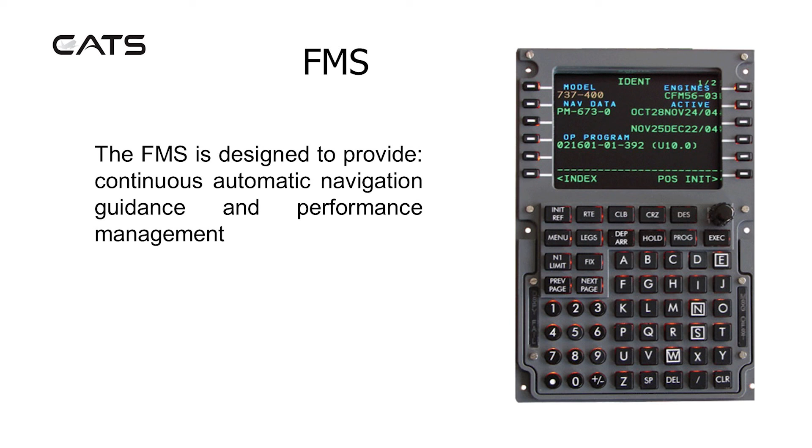FMS, Flight Management System. The FMS is designed to provide continuous automatic navigation guidance and performance management. It was first introduced on the Boeing 737-200 in 1979 as the Performance Data Computer System. The flight management computer was a huge technological step forward. Smiths Industries has supplied all FMCs installed on the 737.

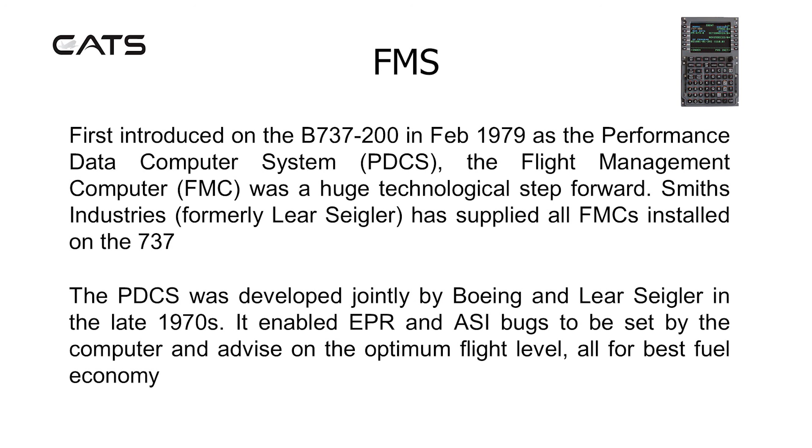The Performance Data Computer System was developed jointly by Boeing and Lear Seigler in the late 70s. It enabled engine pressure ratios and airspeed indicator bugs to be set by the computer and advise on the optimum flight level, all for best fuel economy. It was trialled on two in-service aircraft, a 727 and a 737, for 9 months in 1978, with regular line crews and a flight data observer.

The 737 showed average fuel savings of nearly 3%. The 727 gave a 4% fuel saving because of its longer sector lengths. The Performance Data Computer then quickly became standard fit, and many were also retrofitted. By 1982, the autothrottle had been devised, and thrust levers could be automatically driven to the values specified by the Performance Data Computer.

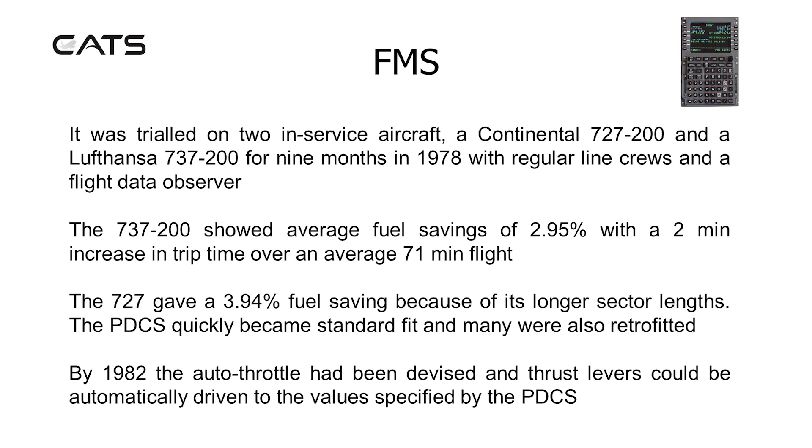The true FMC, Flight Management Computer, was introduced with the Boeing 737-300 in 1984. This kept the performance database and functions, but also added a navigation database, which interacts with the autopilot and flight director, autothrottle and inertial reference systems. The integrated system is known as the Flight Management System, FMS, of which the FMC is just one component.

Most aircraft have just one FMC, but there's an option to have two, and in this case it's only taken by operators in MNPS airspace, for example oceanic areas. The FMS can be defined as being capable of four-dimensional area navigation, latitude, longitude, altitude and time, while optimizing performance to achieve the most economical flight possible.

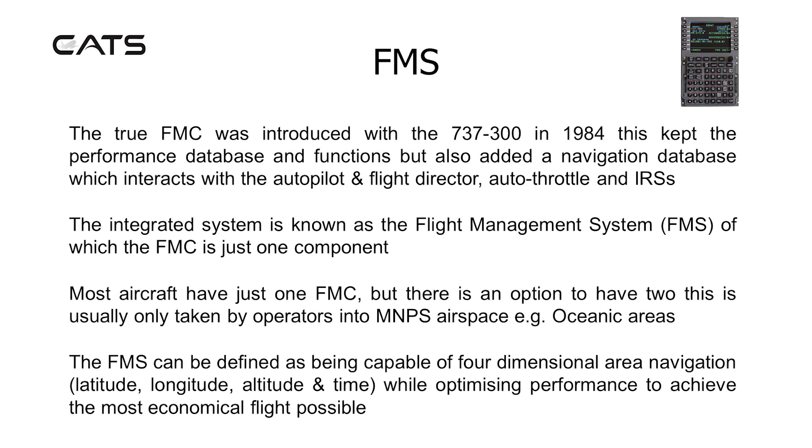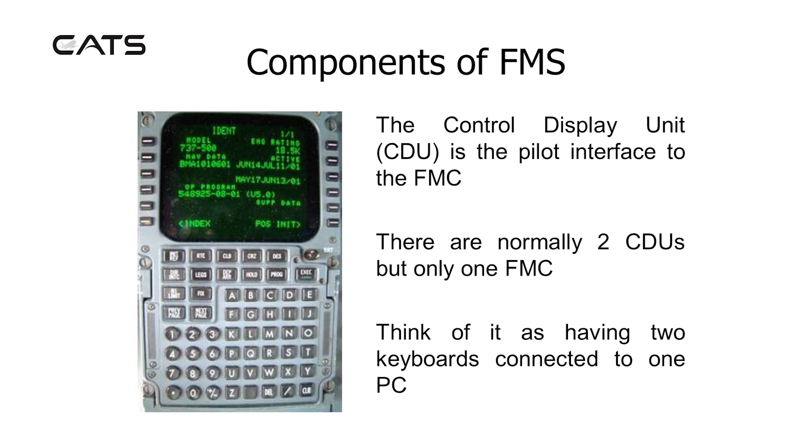The components of the FMS then are the Flight Management Computer and the Control Display Unit. The Control Display Unit is the pilot interface to the Flight Management Computer. There are normally two CDUs, but only one FMC. Think of it as having two keyboards connected to one PC. The navigation database is used to store route information, with which the autopilot will fly when in LNAV mode.

When given data such as zero fuel weight and maximum authorized takeoff weight, it takes inputs from the fuel summation unit to give a gross weight and best speeds for climb, cruise, descent, holding, approach, drift down, etc. These speeds can all be flown directly by the autopilot and autothrottle in VNAV mode. It will also compute the aircraft's position based upon inputs from the IRSs, GPS and radio position updating.

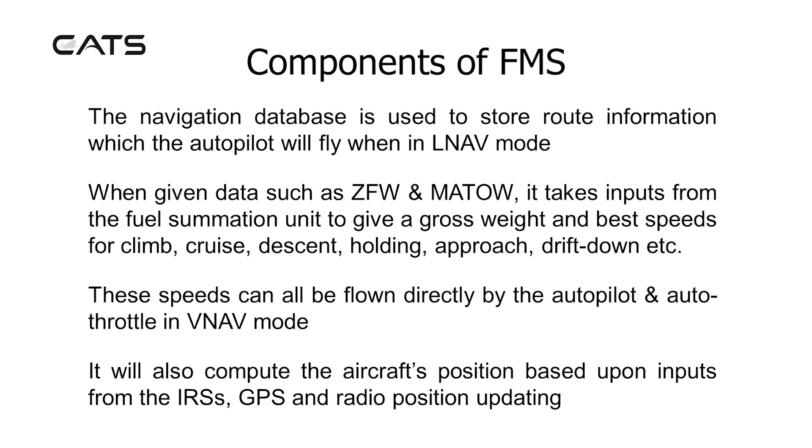Here's one of the first pages. Initialization Reference Index. From here, using the keys on the left, 1, 2, 3, 4, 5, 6 of them, these are referred to as line select keys. On the left, line select key 1 is ident, line select key 2 is position, line select key 3 is performance, line select key 4 is takeoff, line select key 5 is approach, and line select key 6 is offset. On the right hand side there's also line select keys 1 down to 6.

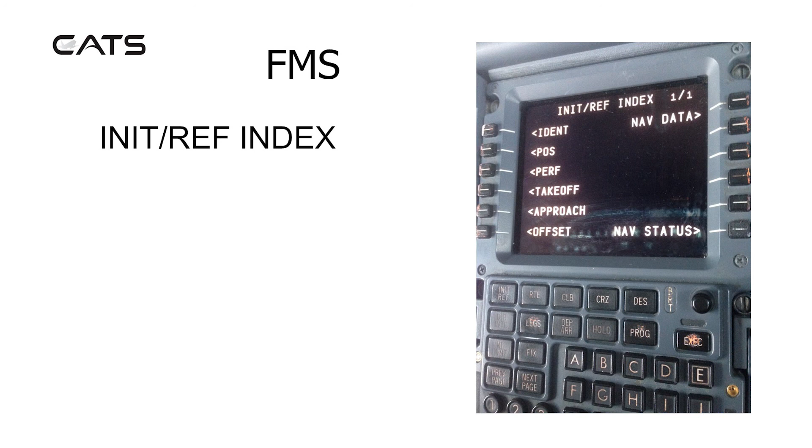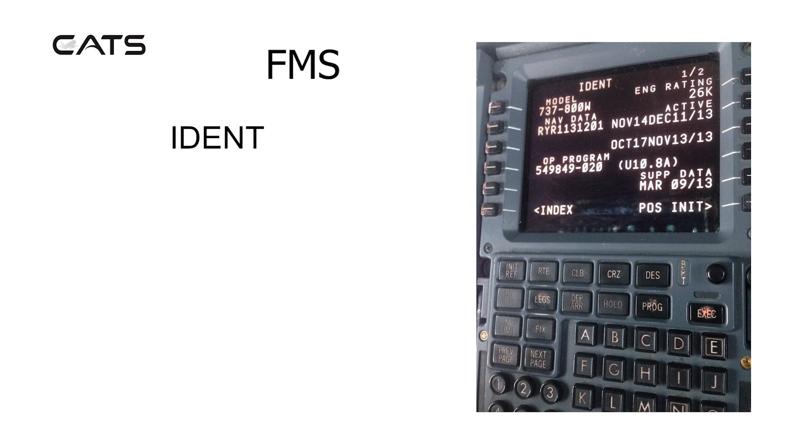So this is position initialization. It's page 1 of 3. It shows the last position, and information can be put in for a reference airport and a gate. Line select key 6 left will take you back to the index. Line select key 6 right will take you onto your route.

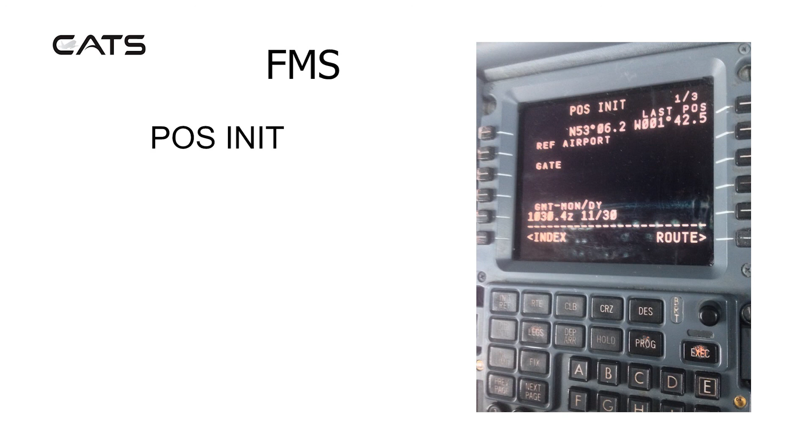Here's position ref, page 2 of 3. And you can see a variety of positions. Flight management computed position, IRS left position, IRS right position, GPS left position, GPS right position, and radio updated position. The pilot could choose any one of these, which one he or she feels is the most accurate for use.

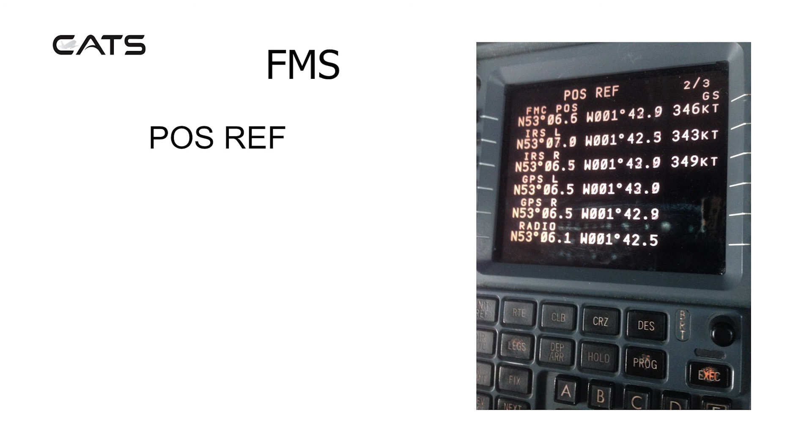This is the route page, page 1 of 3. Act means the active route. If you make any change to it, it will change to mod route. The origin here, Stansted, with the flight plan and the destination, Dublin. Clicking onto page 2 of the active route, you can see the course that the aircraft is going to take.

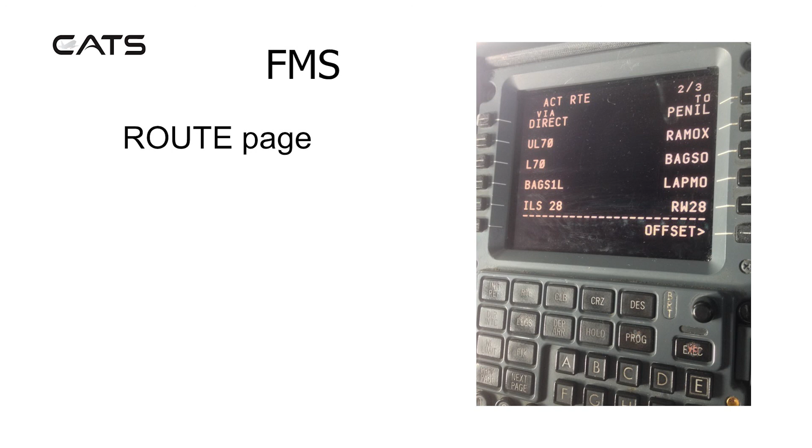On the legs page, there's one of 5 pages shown here, and it's more detailed information of the route, showing details such as distances, speeds, and optimum levels to fly at. You can see bottom left is required navigation performance, which is required, and the actual navigation performance being achieved.

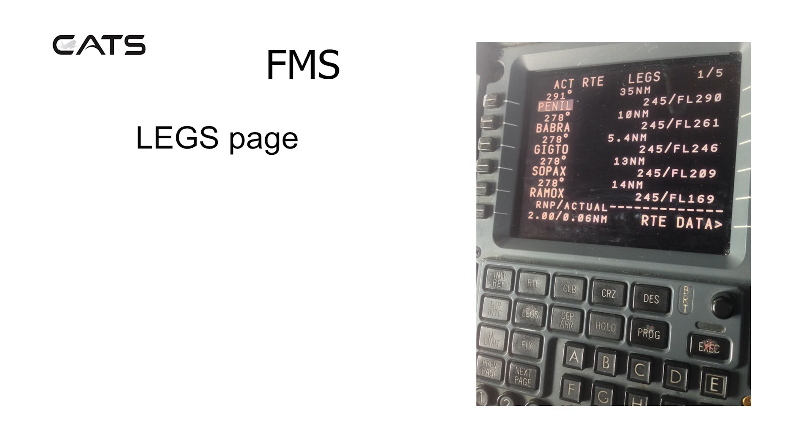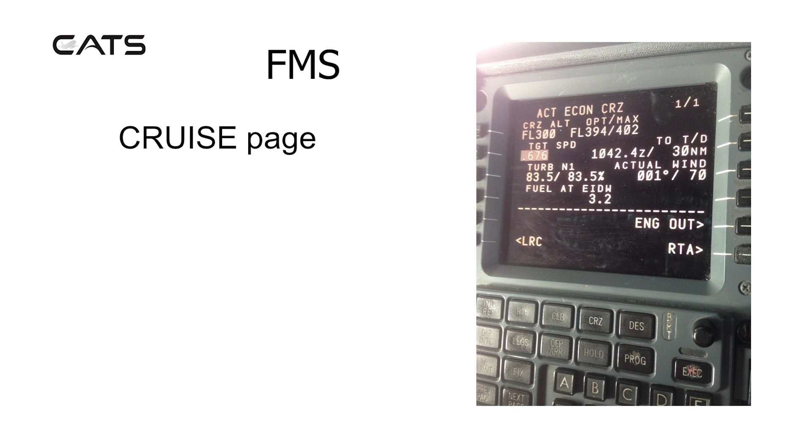Here's the cruise page. It's an active Econ cruise, page 1 of 1. There are quick buttons on line select key 5 right for engine out, and line select key 6 left for long range cruise. Here's the descent page, showing an Econ path descent.

This is the progress page, page 1 of 4, and it shows data from the altitude, the actual time of arrival, the fuel, the estimated time of arrival for the next waypoint, and the fuel status as the flight progresses. Also bottom left, you can see the direction of the wind and the wind speed. Here's page 2 of the flight progress page, showing headwind and crosswind components, cross-track errors, and true airspeed.

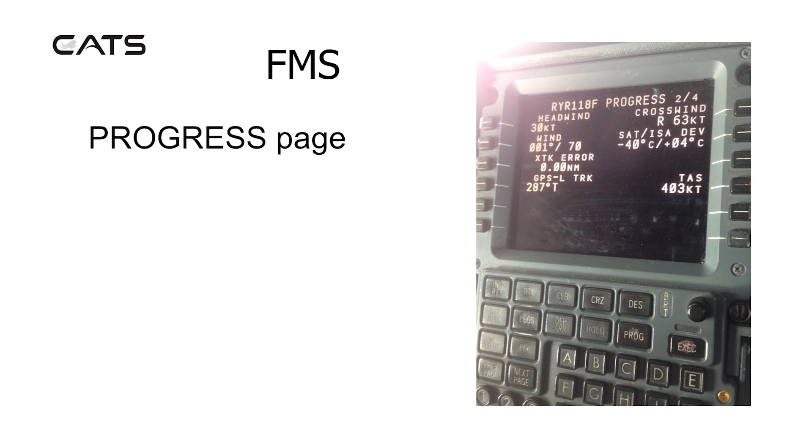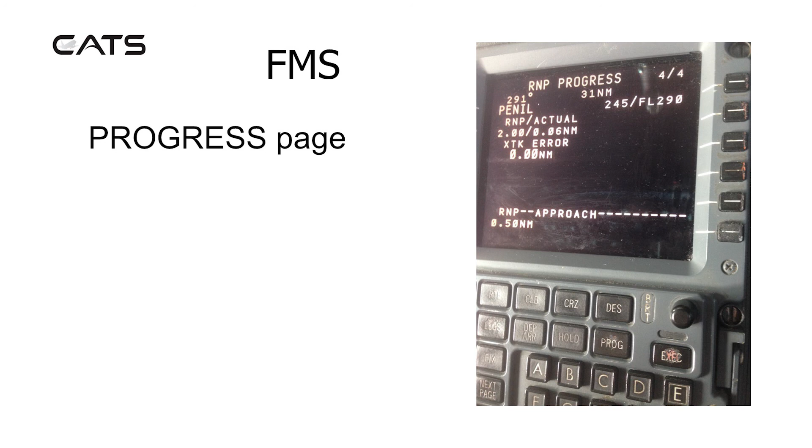Here's RNP progress, page 4 of 4. Just more detail of actual and required performance. This is the N1 limit page, 1 of 1. So these are values which in all honesty the autopilot will select, but via the flight management system for the go around, economy, climb or cruise. These are percent N1 values which would be set.

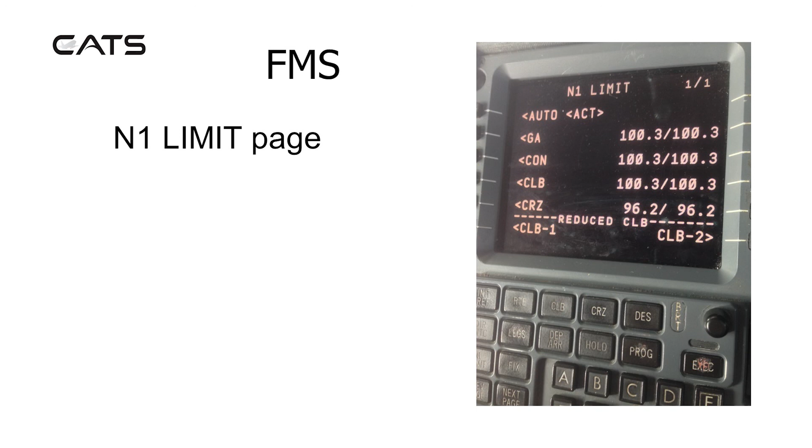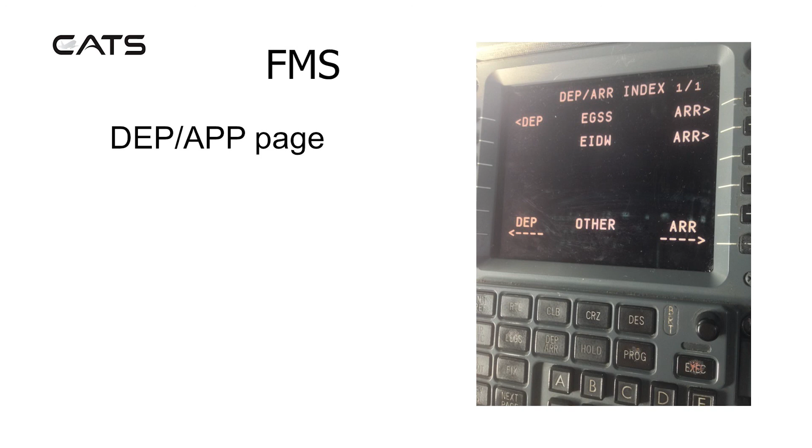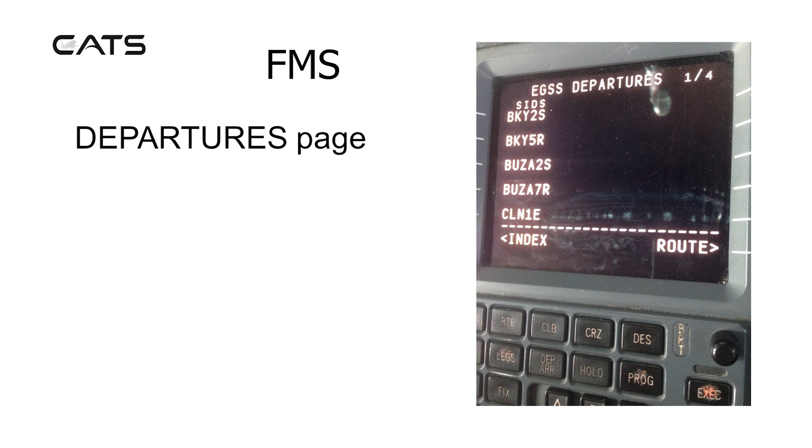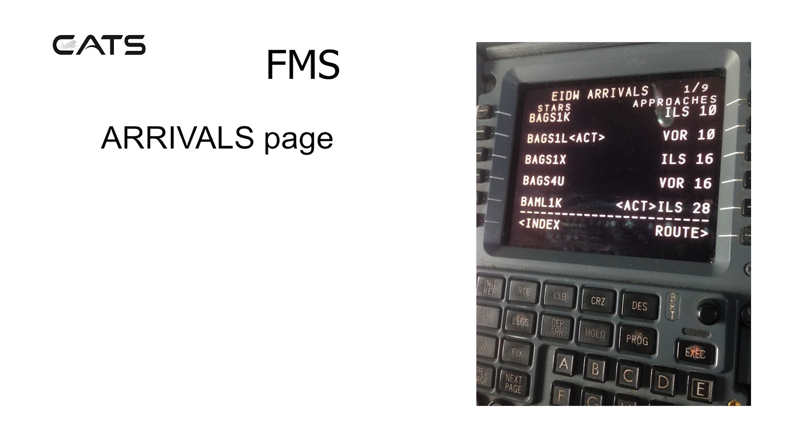Here's the departure arrivals page. So you can click line select key 1 to edit the departure, line select key 1 and 2 right, that is, for the arrivals. And looking more closely at the departures page, these are standard instrument departures, SIDs, leaving Stansted. These are the arrivals at Dublin. So it's all there to be selected because it's programmed into the navigation database. The ones that are active have got ACT next to them.